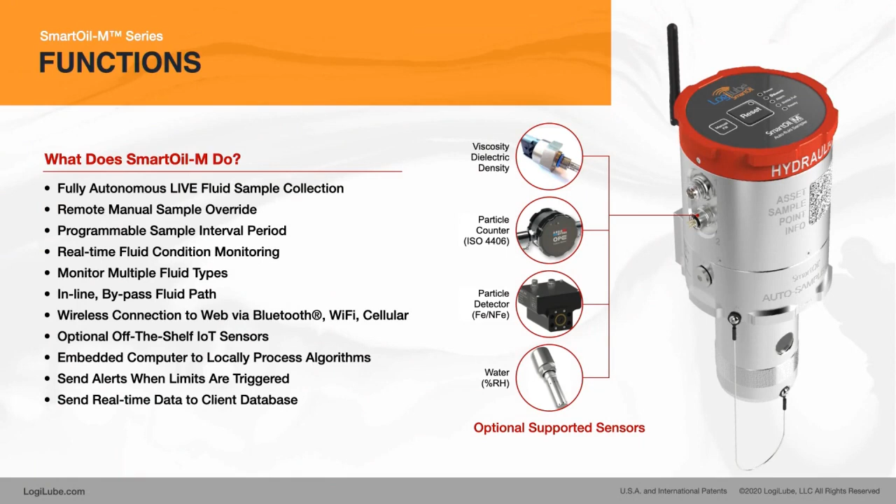My name is Bill Gillette, and I am the CEO and founder of LogiLube LLC, a technology company based in Denver, Colorado. Today, I'd like to present the new SmartOil-M technology that was developed for the mining industry. The functions of the system are many, but as you can see, it is a hardware and software system. It facilitates fully autonomous live fluid sampling from mining equipment such as haul trucks, excavators, or even stationary equipment like mills. Given that it is an autonomous system, it also removes people from harm's way of collecting oil samples from equipment that's operating.

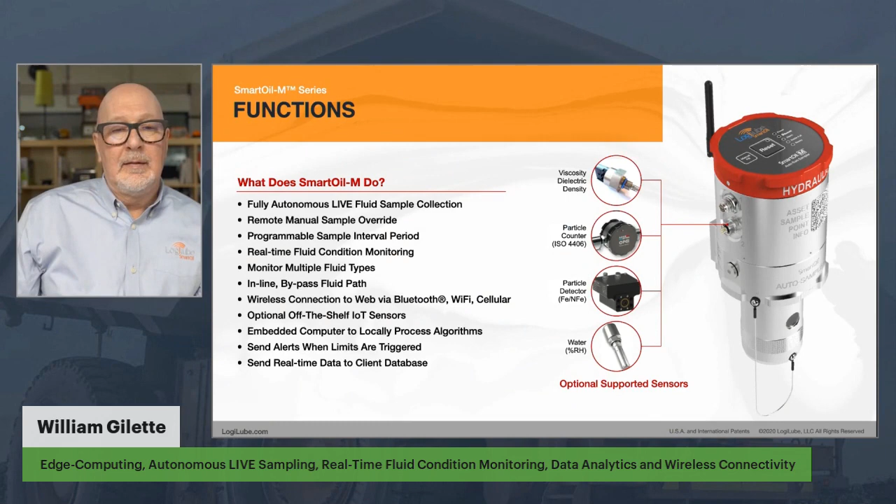Furthermore, you can see on this slide that we also have the ability to incorporate multiple external sensors. The sensors listed are currently supported, and they include viscosity sensors, particle counters to derive the ISO cleanliness code, particle detectors, both ferrous and non-ferrous, as well as water contamination in oil. The system is powered by an embedded computer or an edge computer inside this unit, and that helps facilitate not only the limits when they've been exceeded, but also managing the bottle fill events.

In addition to autonomous oil sampling, the SmartOil-M system also has the ability to capture data and send it up to the cloud or to the client's network. This is done through a Bluetooth connection. It's a long-range Bluetooth connection, up to 1,000-foot line of sight, and it sends the data as well as the event history from sampling. That data gets sent through a companion app, a mobile app running on an internet-connected device, a smart device like an iPad or an iPhone.

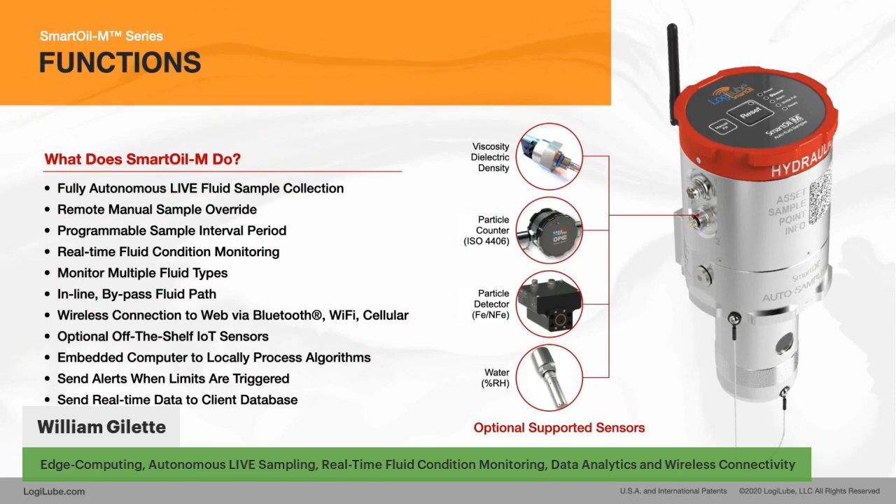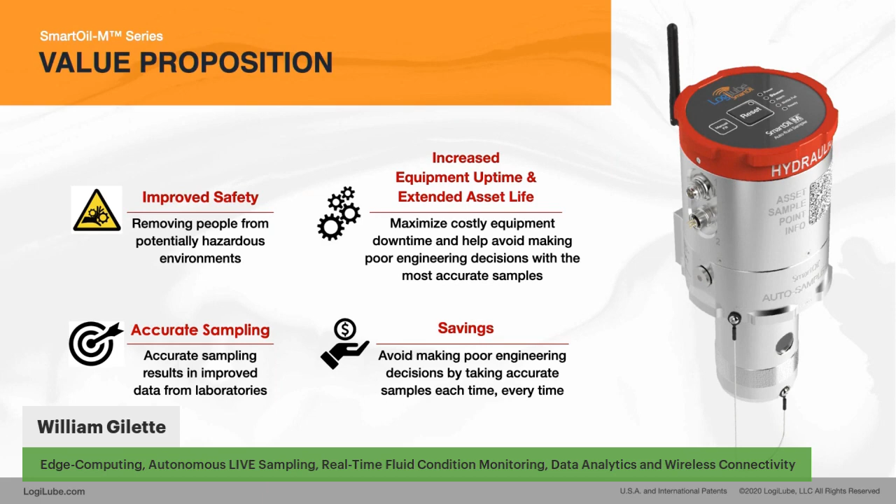The value proposition of this M series is rather straightforward, and there are 4 top value propositions: improved safety, accurate sampling, increased equipment uptime, and of course, dollar savings in lower operating costs as well as increased revenue.

The SmartOil-M device is a hardware solution as well as a software solution combined with an internet-based data management system. As you can see in the slide, the hardware communicates through the web via an internet-connected device, a smart device like an iPad or an iPhone, through a companion mobile app, and that allows the user to query the devices and check on the status of the various fluids, as well as to remotely trigger a fluid sample from the safety of not being on or near the equipment.

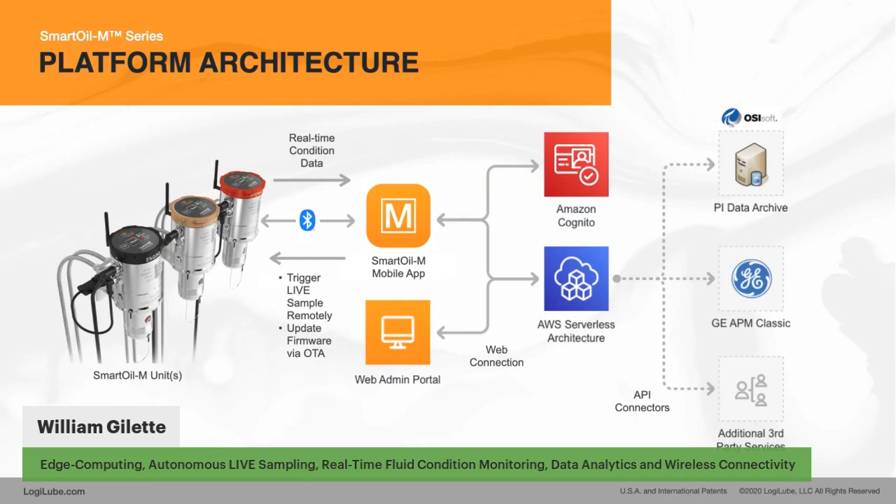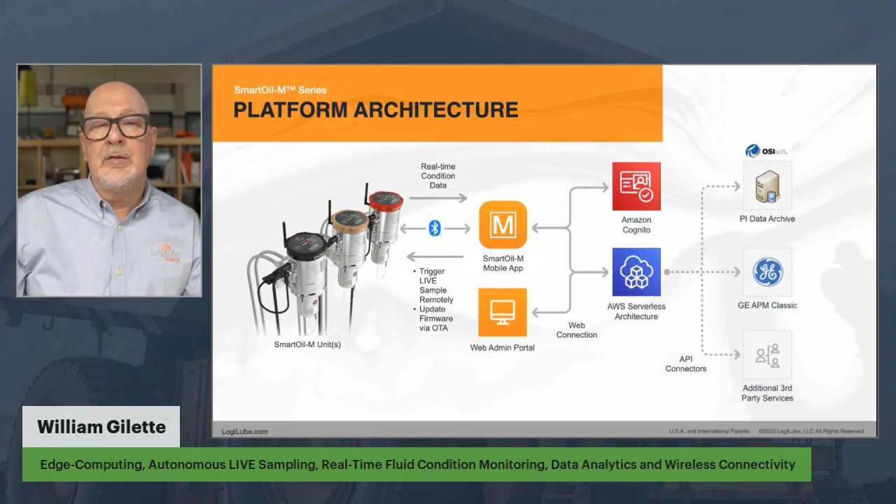Additionally, the mobile app allows communication to the devices for updating firmware and software in the background through an over-the-air process. And lastly, you can see there's an arrow that starts from the M device through to the mobile app, providing real-time condition data for each of the fluid streams.

The next slide illustrates a summary of the hardware features: the connectivity, the various data feeds and methods, power, as well as the various agency approvals that this device has gained in the recent several months. The system is approximately 5.5 inches in diameter, about 12 inches tall, and weighs about 8 pounds or so.

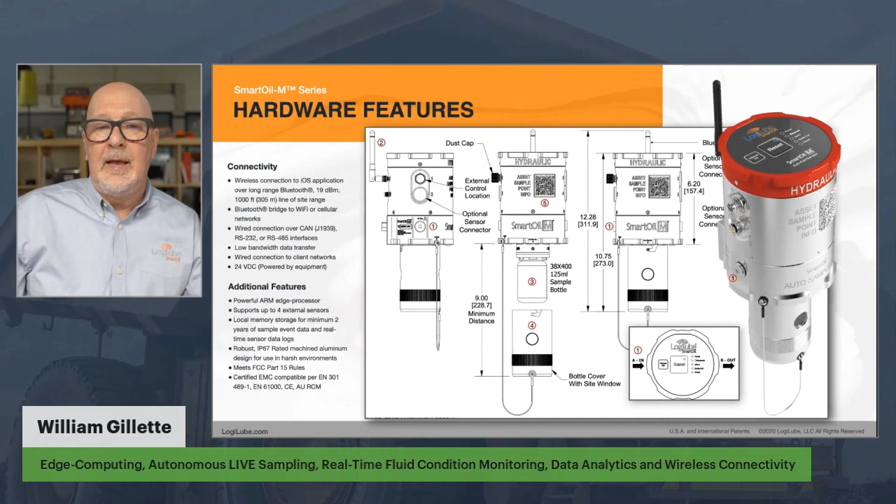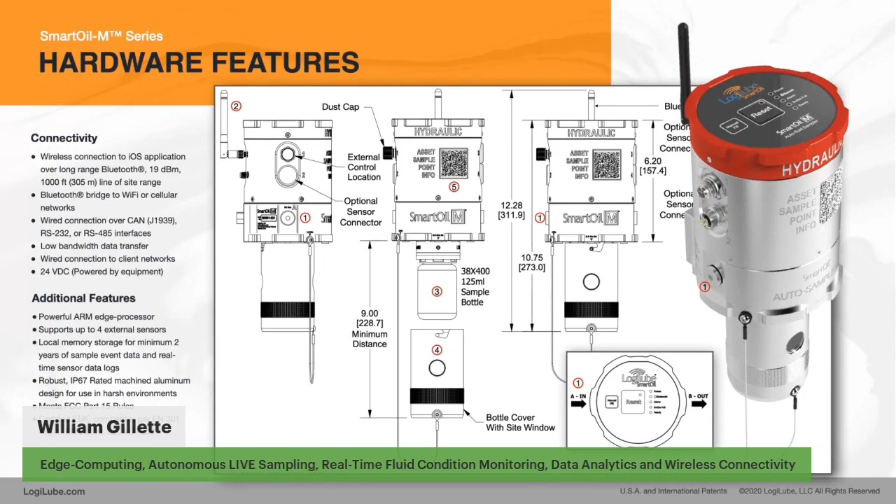It is mounted directly to a piece of equipment, be it a haul truck engine or possibly plumbed into a transmission, steering, final drive, etc. You can see in the image in the lower right the fluid path as the oil or working fluid passes through the system through some sort of a bypass loop or a kidney loop at about 1.5 gallons per minute flow rate.

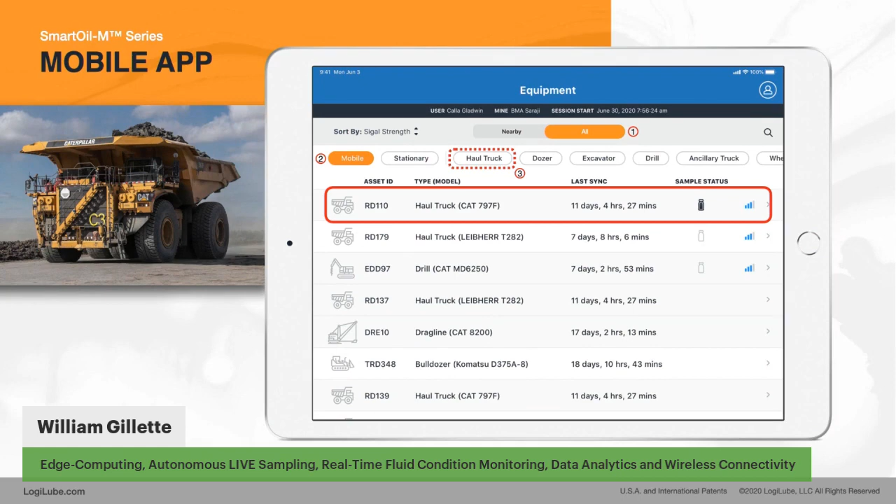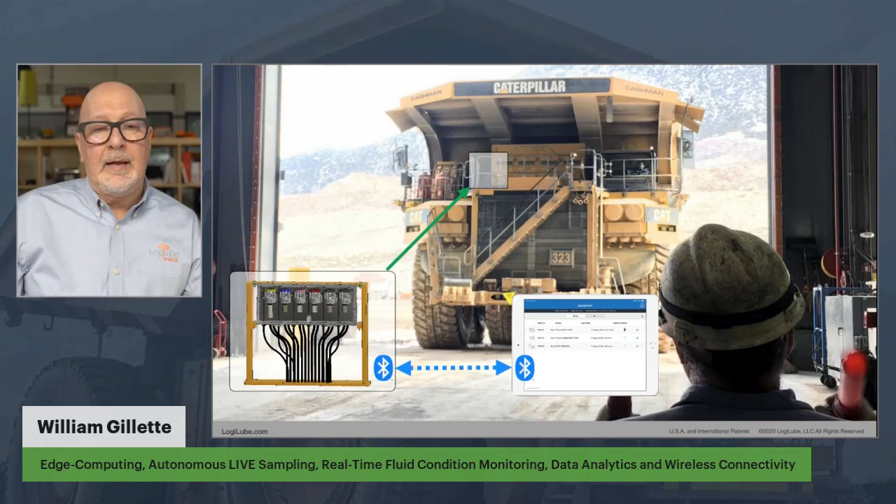As you can see in this slide, the haul truck is actually entering the bay of the shop. The mechanic, standing in a safe zone away from the haul truck, is directing the driver to halt for just a minute outside of the garage, while the mechanic queries, in this case, 6 different fluids to determine the health of the fluids, for the most part looking to see if there are any warnings or alarms, or even if the various sample bottles have been filled or need to be filled.

As the mechanic transitions through the slides, this particular asset is further down selected. You can see from the screen there are 3 mobile assets that are within Bluetooth range, and again the item circled in red is the particular haul truck in question.

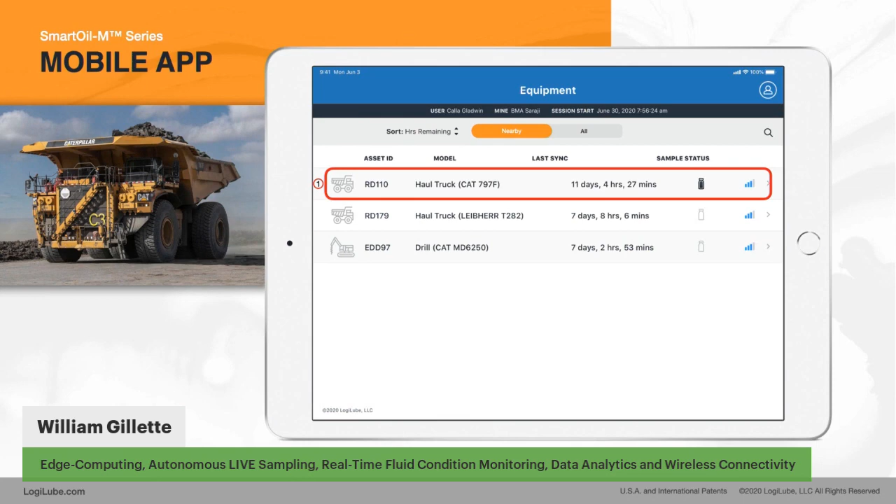And furthermore, the mechanic has now pulled up data on the 6 different fluids on this haul truck. The menu on the left gives the mechanic a view of all the various fluids and some basic conditions for each of them. You can see in this example that there are multiple fluids being monitored in real time. Each fluid has its own dedicated M unit. In this example, engine oil, hydraulic oil, final drive oil, transmission oil, steering fluid, and coolant.

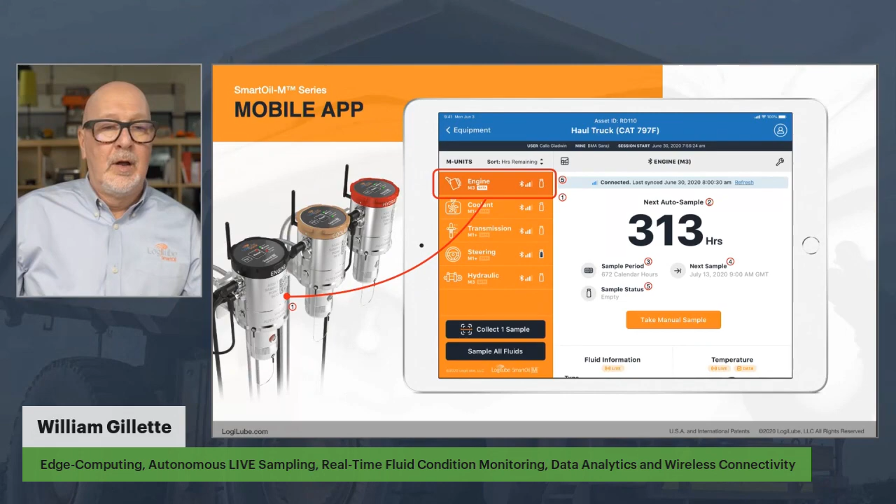This slide illustrates what the mechanic might see when querying the engine oil itself. And you can see the big bold number of 313. That's the number of hours remaining between now and the next auto-generated sample. The additional text below 313 is a collection of additional data that the mechanic might find useful, and that would be the sample period, whether it's based on a calendar or on machine time, and the operating machine time of the engine.

It also estimates the next automated sample that would be generated if this system was operating out in the field. And then also you can see the status of the bottle. In this case, the icon is empty, so the sample bottle is not full. And you can see from the orange button, the mechanic can remotely initiate a manual sample process.

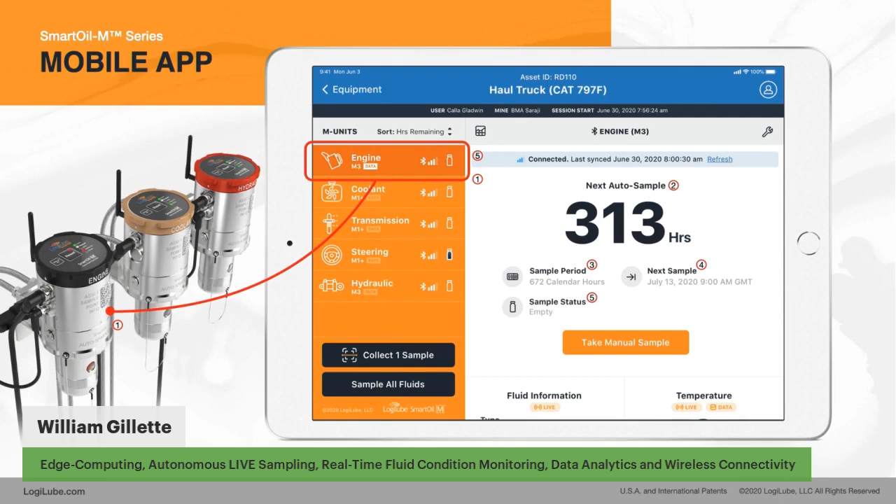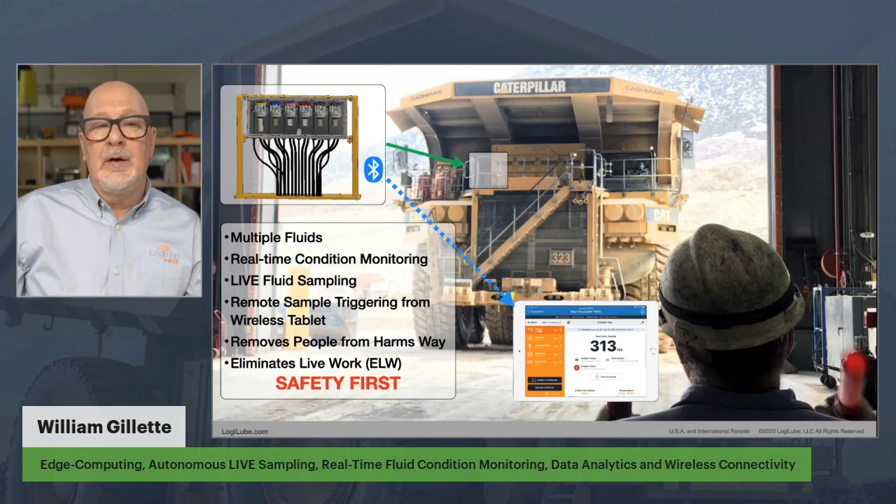Moving along, this slide summarizes the mechanic's view and some basic information that the M series can provide for this particular installation. In general, we're talking about multiple fluids, real-time condition monitoring of the fluids, live fluid sampling capabilities, remote sample triggering from a wireless tablet, and also safety, safety, safety. Safety comes first. This entire technology solution provides for live sampling while preventing the technicians from being in harm's way, and it also eliminates live work, which is a new initiative amongst the top global mining companies.

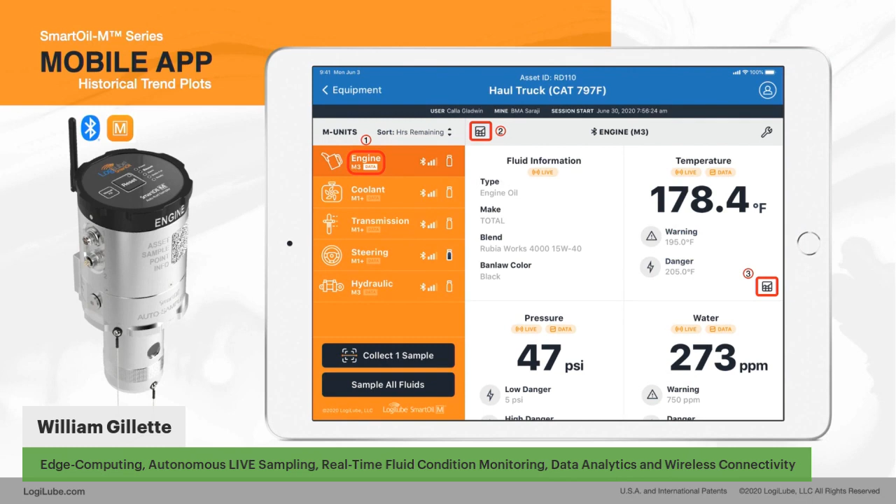This particular slide illustrates several key icons that are quite important for a reliability engineer and/or ops folks, and that is the ability to view historical plotted data. As you can see circled in red, there are a few icons scattered throughout this screen of a tiny little graph. If you were to click on either one of those, it would take you to a slide that graphs or plots the data for the particular sensor. Now, each data pane for which the client has engaged in a data subscription has that icon, and when it's clicked, you can plot the particular history.

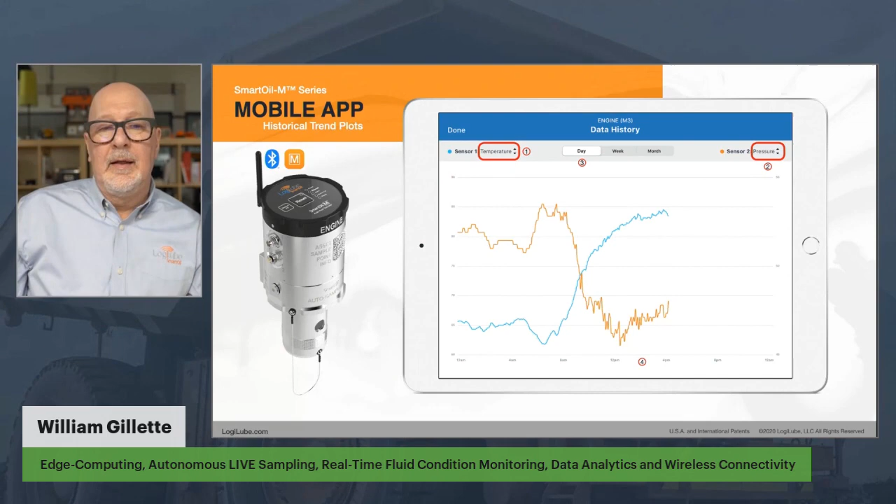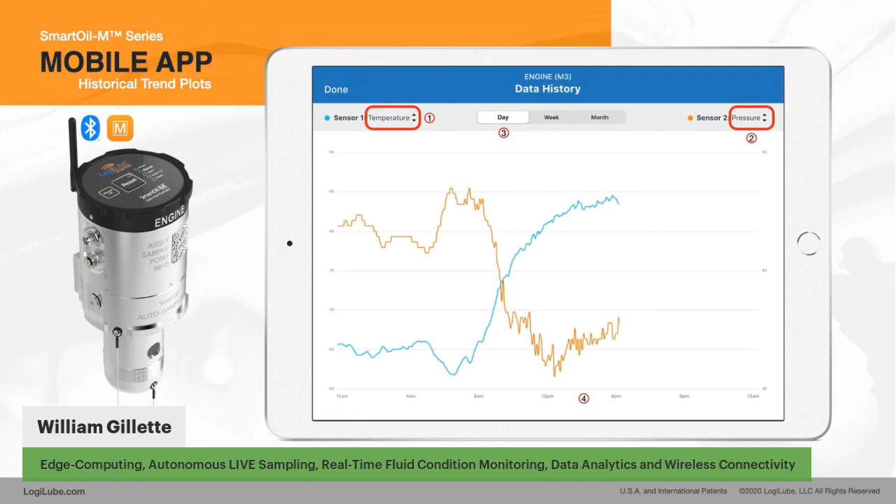In this case of this slide, there are two graphs that are plotted, and one is for temperature and one is for pressure. The system has the ability to plot 2 simultaneous data feeds over the top of each other. And like most smart tablets, using the pinch and zoom process with your fingers, you can change the scale of the data plot, either broadening it out to look at it from a weekly, monthly, annual view, or really zoom in, in this case, on an hourly basis. And pinch and zooming the other direction, you can change the y-axis as well.

So again, from the safety of a remote safe zone, the mechanic or technician can actually initiate or trigger an automated autonomous sample remotely. And by pressing the orange button labeled Take Manual Sample, boom, it initiates it. It basically communicates via Bluetooth back to the device that's mounted on the haul truck, and actually processes the sample.

Now, a key thing to note is the sample bottle might be 90 milliliters, 100 milliliters, even some custom range. That can all be programmed during the commissioning process, as well as, during the commissioning, the viscosity of the fluid. If it's a gear oil, it might be quite high. If it's a transmission or hydraulic fluid, it might be maybe an ISO 32.

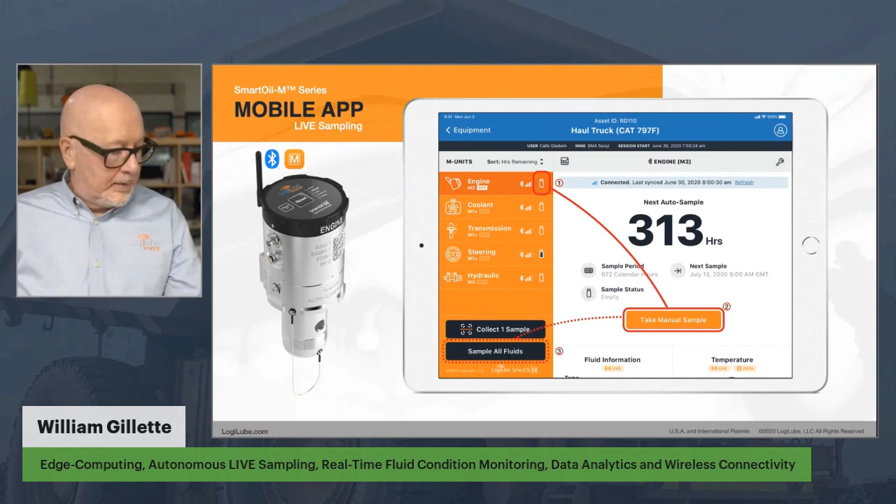So the length of time that the valve remains open to fill the bottle is determined. It's calculated. Again, we have an edge processor, so it can take into account temperature, pressure, viscosity to instantaneously calculate the length of time the valve stays open to properly fill the bottle. So a couple examples. This is a classic 125 milliliter standard bottle. But if I was to have a smaller bottle volume, I would want to program that into the device during the commissioning process so the bottle is not overfilled and makes a big mess.

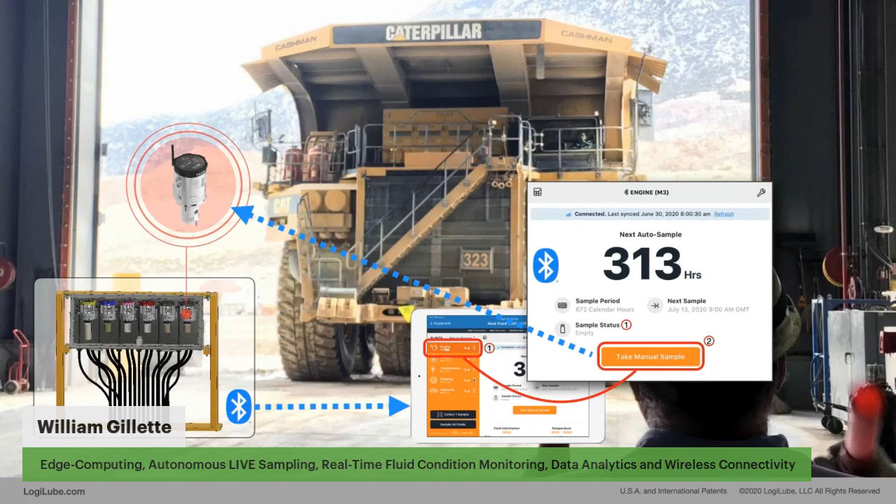This slide actually summarizes that manual bottle sampling process. Again, you can see the mechanic's view, a zoomed in view of the actual orange button to actually take the sample. It sends a Bluetooth signal out to the device. The particular M unit that's affiliated with the oil sampling then basically executes that sample and fills the bottle. Upon the completion of this sampling, there is a notification back to the mechanic, again via Bluetooth to the device, then to possibly the client's network, that the bottle is ready to be harvested.

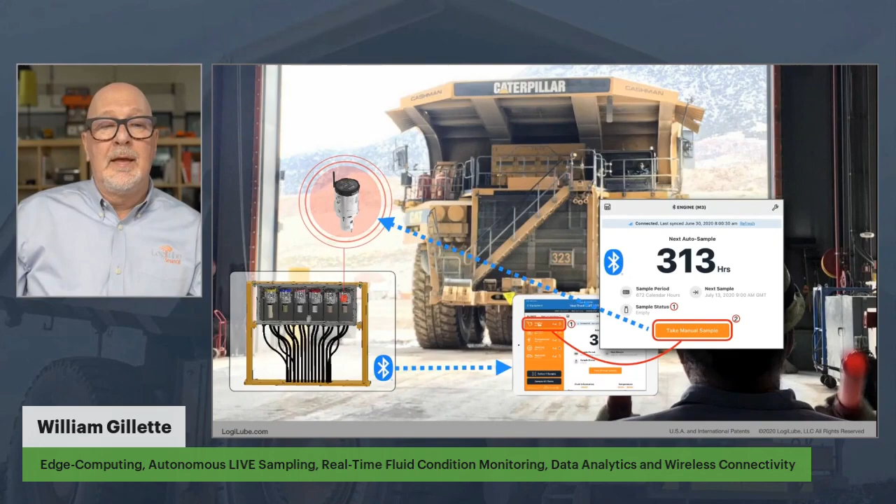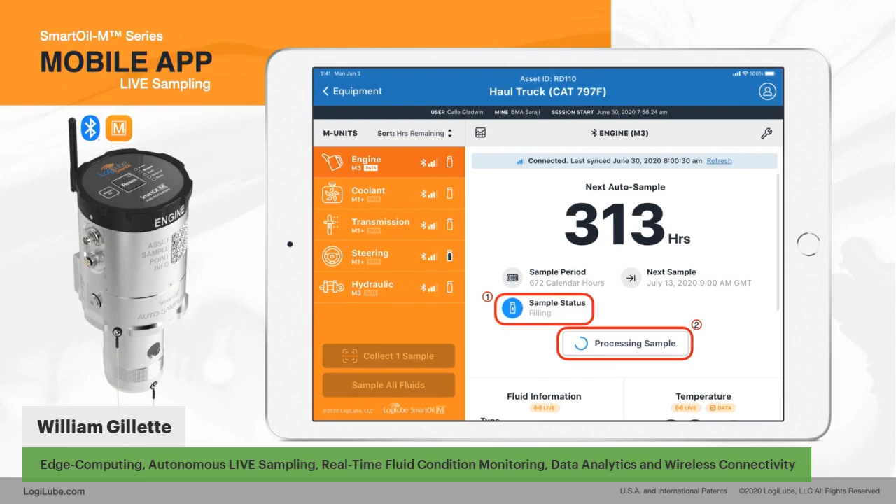When the sample process has been completed, again the mobile app screen actually gives an indication that the sample has been processed. It gives a status of the sample bottle, and it would have a big bold "completed, ready." Come get the bottle, harvest it, send it back to the third-party laboratory.

I'd like to actually introduce you to the actual M units and some of the technology around it. I have over here on my left two different units. One, as you can see, is labeled for hydraulic fluid, and the other is labeled for engine oil. And there could actually be 3, 4, 5, 6 of these, depending on the different fluids that are being monitored. Right off the bat, you're going to see a QR code. You're going to wonder, well, what's this all about?

Well, when the sample bottle is being harvested, the mobile app, using the iPad or iPhone device running the mobile app, actually can scan this QR code, which has embedded in it a particular asset location, the fluid type, the fluid information. It could be a Shell, an Exxon, a Total fluid, and that's all embedded in this code. And then the sample bottle would also have a barcode.

So the mobile app walks through the scanning process of first scanning the sample point information, second scanning the barcode on the lab-provided bottle, and when the mechanic's done swapping out a used bottle for a new bottle, and that's actually underneath this aluminum protector, then the mobile app actually prompts the mechanic to hit the submit button. That data then goes off to the cloud or to the client's network to actually log the fact that there is a new sample that's been collected and it's ready to go to a third-party lab.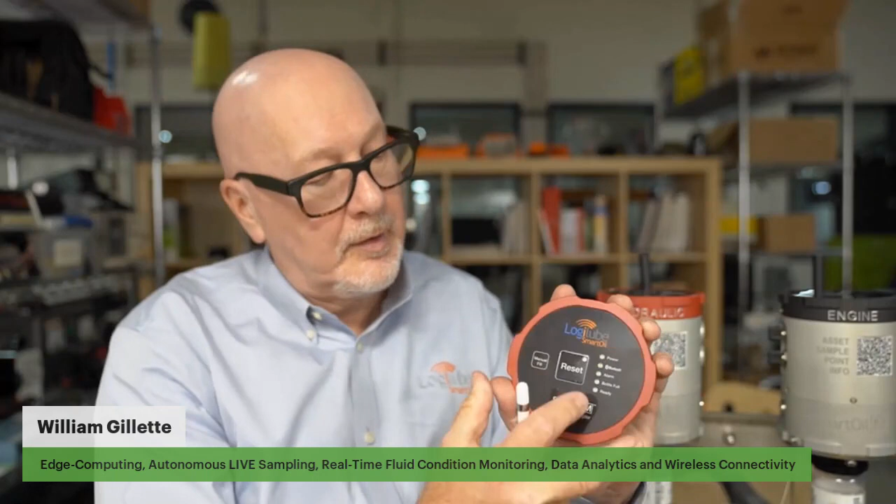And you can see there's a big fat reset button. And underneath this panel is a snap dome. You can hear it, and it's a very tactile system. And so what happens is when the bottle's been collected, the mechanic, as the last step, would press this reset button, and it actually tells the system that a fresh new bottle is in place. And so when an autonomous scheduled oil sample comes up for filling a bottle, it doesn't put new oil on top of oil that's already existing in a bottle.

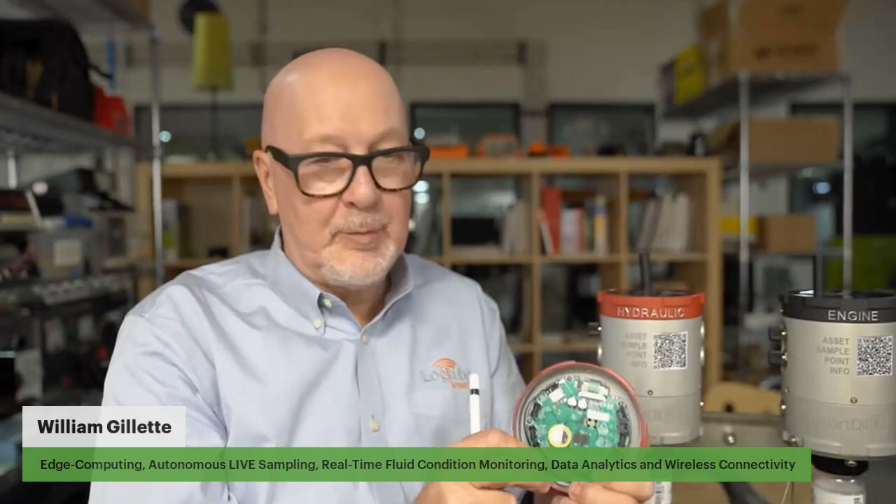I mentioned also there's an edge processor. So on the inside, underneath this cover, is a 5-layer PC board assembly, and you can see a whole array of these black connectors. Now, what are those for? Those are for the possibility of adding optional sensors through these various sensor connector ports, and I have several examples here. This is a viscosity sensor, which measures not only viscosity, but the fluid's density and temperature and dielectric constant.

Also, sensors for measuring water in oil contamination. And there's a myriad of other sensors as well. LogiLube is not a sensor company. We are completely agnostic to sensors, but there are many best-in-class IoT sensors that could be utilized by this smart oil system.

Back to this printed circuit board and the embedded computer, these various black connectors are actually a series of, whether it's Modbus 485, it could be RS-232, it could be just a 4 to 20 milliamp, a CAN bus J1939 spec. We really don't know what the client or the application might require, but by having them all pre-designed and pre-programmed and connected, whatever data comes in can be processed by this edge processor. We also have a 3-year lithium-ion battery for battery backup, and there's a big 4-core ARM processor to drive all this.